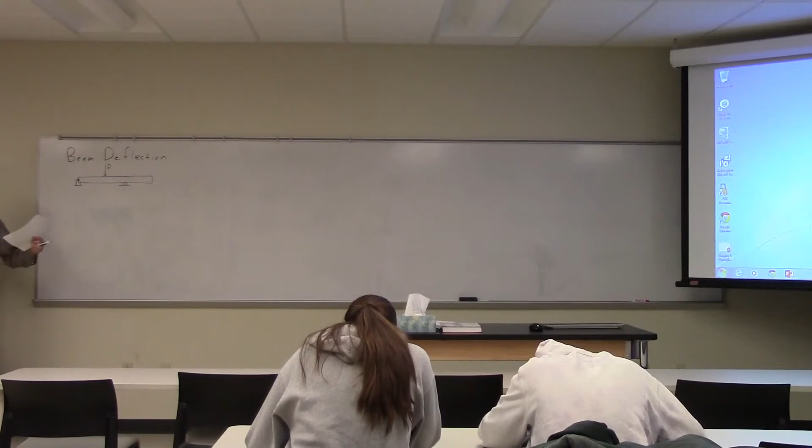Right, so a flagpole can handle a big beam deflection, right? Or a signpost, something where the beam doesn't really matter, like a street light. You can, and in general the roof of a Walmart can accept a deflection, because it's a steel roof, it can accept a bend. So there's plenty of cases where it can, but you're right, there are a lot of cases where it can't.

I mean, if it's a beam supporting a concrete platform or something, concrete typically doesn't want, you don't want the concrete to flex.

Okay, so what's this going to look like? If I push down with a force P there, how's it going to deflect? Is this point going to move? No. What about over here? Is it going to move? Yes, down. Okay, is it going to move here?

We're only talking about the vertical deflection. What about this? Yeah, that's up. So you can kind of qualitatively tell that the beam deflection is going to go like that. That red line is called the elastic curve.

We know qualitatively, in most cases, you have a load distribution on a beam and can generally tell how the beam is going to deflect. When you draw the elastic curve through the neutral axis, you're exaggerating it—we don't expect it to actually bend that far, but it's exaggerated enough to plot out. From here on, we know it's a straight line, since this end doesn't bend because there's no other forces, no internal shear or moment, in that piece at the end.

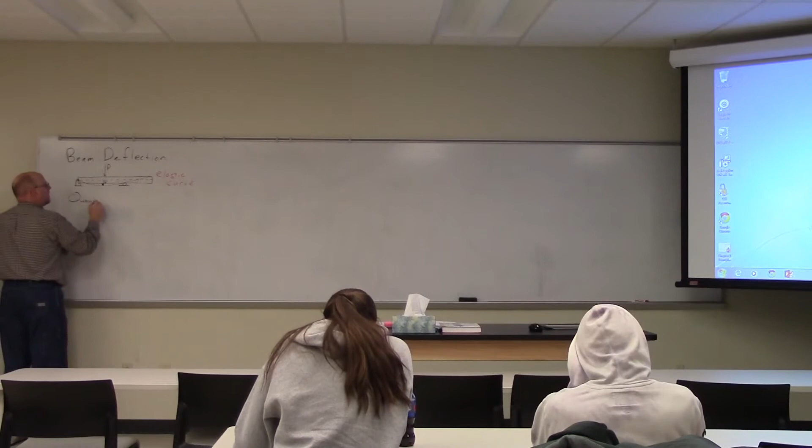So we can draw the elastic curve qualitatively, but generally we don't want just a qualitative measure of deflection. We have this beam deflection we're going to call V, and we want to quantify that beam deflection as a function along the beam at all points. In other words, we want a quantitative elastic curve, not just a qualitative one.

I forgot to fire off the thing here. Oh, that's it—no, wrong chapter.

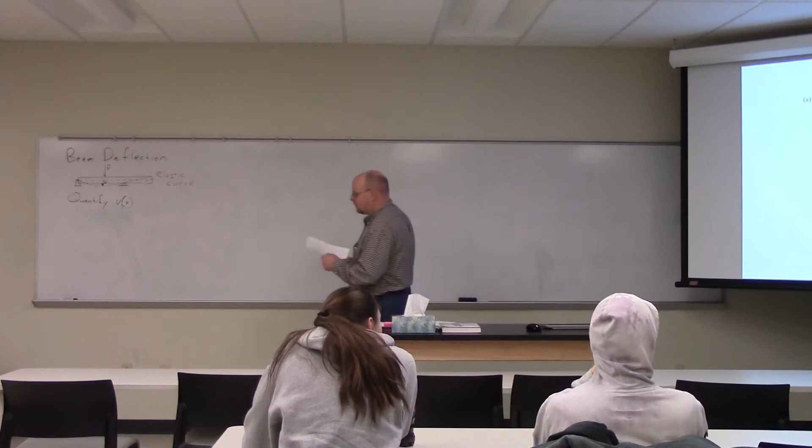What we need to get at is the internal moment, because the internal moment is what's bending the beam. So we have this beam, and you could qualitatively determine that it's going to go down and then up again—you can qualitatively look at that beam up there.

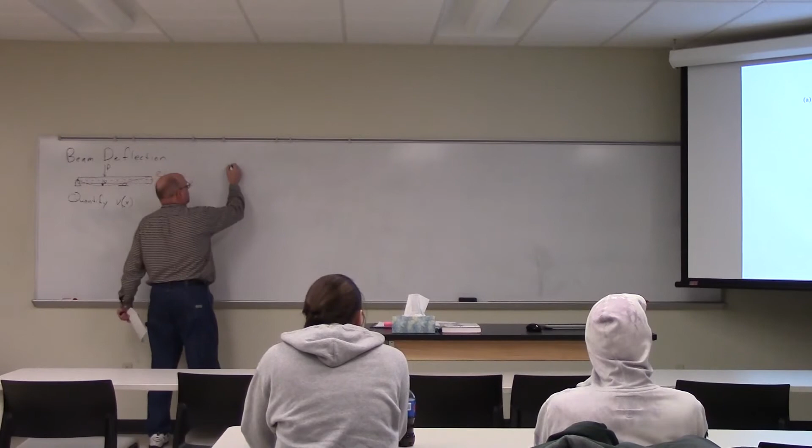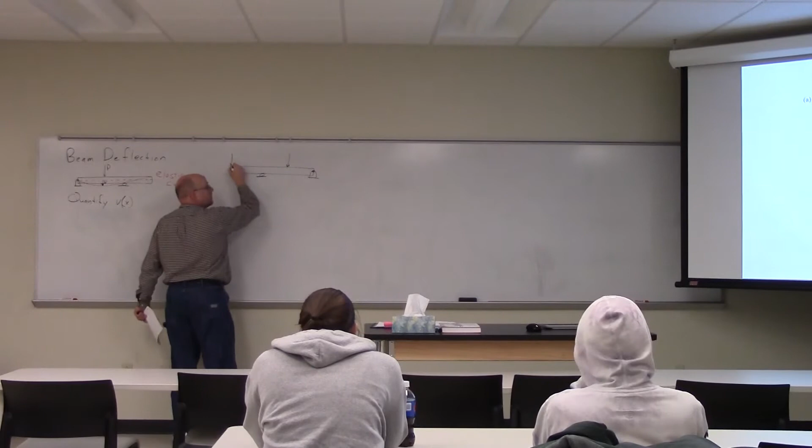The loads are applied here and here, and we draw an elastic curve. You know it's fixed here, and fixed there, so you know it's going to do some wiggle like that.

So what we want to do is find out the moment at each point, and to do that we first need to find the internal moment. For this graph, we have a shear diagram—we do a free body diagram of the whole thing to find out what the shear diagram looks like. Then we take the shear diagram and integrate it to give us a moment diagram.

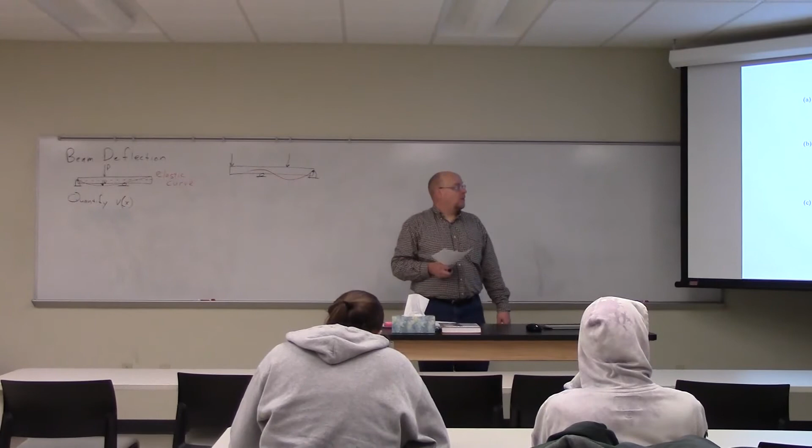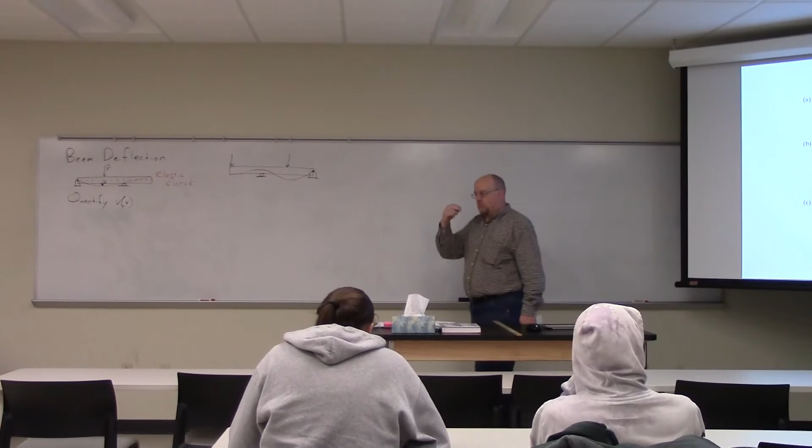Okay, so what we're going to do is take the same approach as we have with everything else. We want to find out the behavior of the beam: take a slice, find the behavior of that slice, and then integrate that across the beam. This is the same approach we took with bending moments, torsion, and everything else—do a slice and then integrate it. Remember this process?

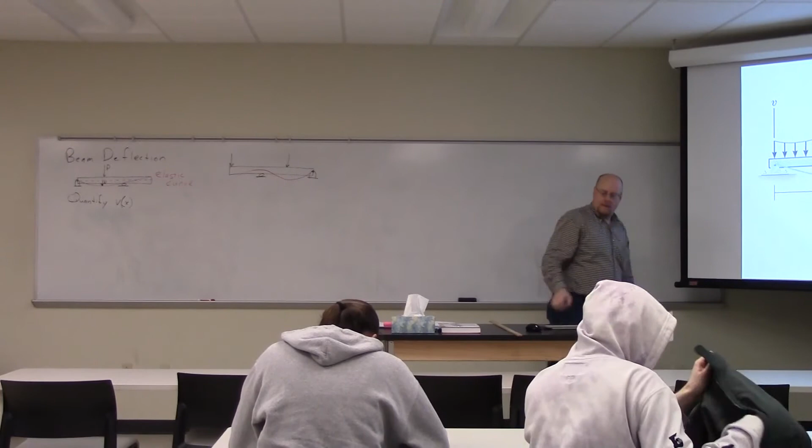Okay, so here's our beam—a different one than the one on the first page. We've got some load out there on the left, a load over on the right, and an applied moment, okay? We're going to take this slice dx in the center, and look at what's going on at that dx as a result of the applied moment, because the moment is what's causing it to bend.

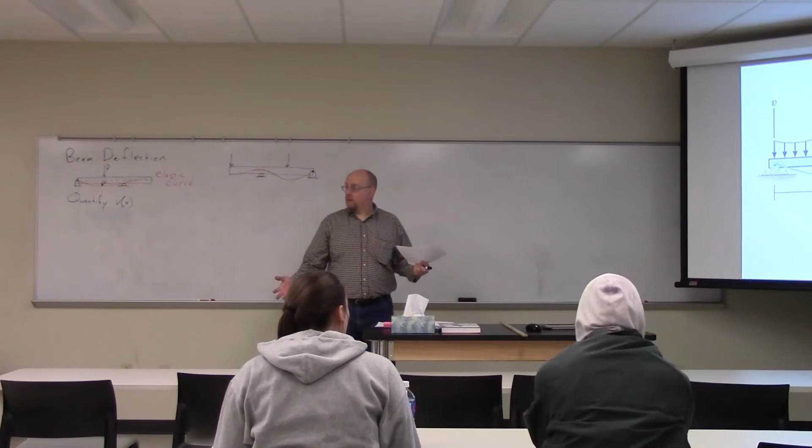Let's back that off in the corner, and then we'll take out that slice. So we have a slice of our beam—doesn't matter what beam it is. We have a slice of beam with the neutral axis through here, with a dimension dx, and then there's a particular plane of interest up here with a length of ds. We're some height y above the neutral axis. Does that make sense, everybody? You understand how I'm defining my positions.

As I bend that up, the right side of my box is going to become inclined with respect to the left side of the box.

So this thing's going to become like a pie wedge. I bend it up. Okay? And obviously exaggerated in this picture, but that pie is going to have some center.

That's what O prime is there. That's the center of curvature of that pie wedge. But that's not actually on the beam, that's just a point in space.

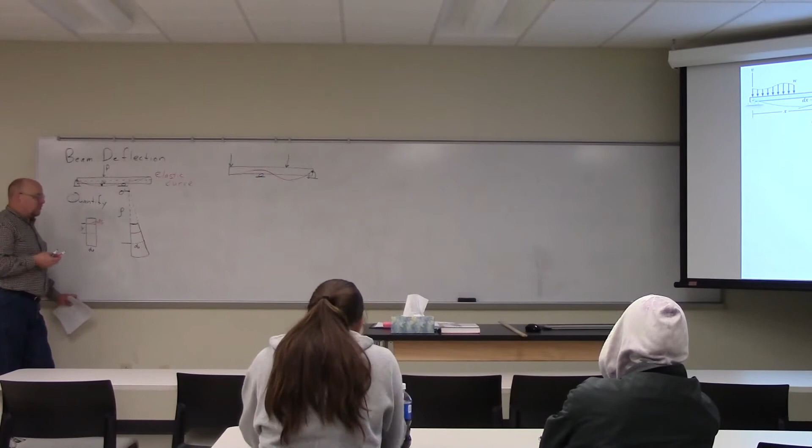But like the length of the curvature, not just a straight length, the line. The length of the curvature part is the same as dx. We're eventually going to let dx go to 0, so those two will be the same. As dx goes to 0, there is no curvature.

This right here now is ds prime, that's our new ds, and it should be less than the original ds, because it's compressed on the top. And we still have the same y dimension here.

And the reason that this happened is because there is an internal moment M within that section. And there's an internal moment that's caused it, yeah?

Since dx is the neutral axis, it wouldn't have an arc, would it? So in the limit, as dx goes to 0, no, it won't. But I've drawn it here as a big, oversized chunk just to get the relationships between everything. So it still would even at large? Yes, I would have to. But the bends, distance doesn't stretch. Okay, the distance along that arc is still the same.

And then we're going to have one more term, and that's theta, the angle, or d theta rather, the angle associated with this incremental piece. Does that make sense to everybody? The drawing, same as the drawing over there on the slide.

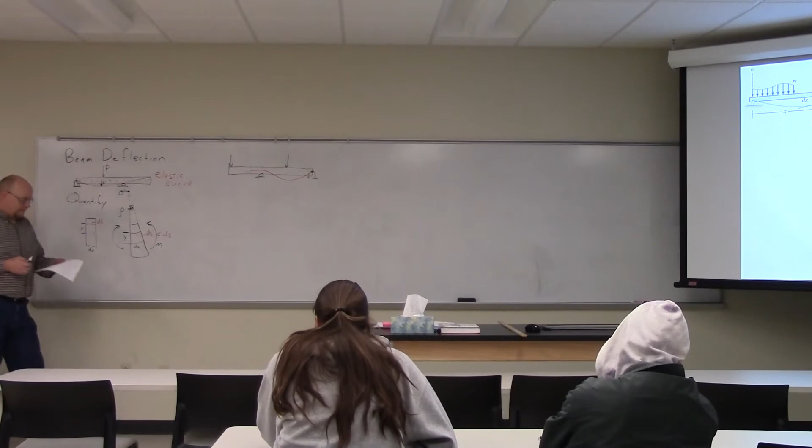Okay, so let's go ahead. So what is the purpose of finding the rho? Yep, I'm just about to show you. I'll do this one. We can express dx in this second case here as rho d theta.

Similarly, we can express ds prime as rho minus y d theta, slightly smaller radius to the ds prime location. And we know the original ds is equal to dx because it was undeformed. Ultimately, what we're trying to do is find rho.

Trying to find out how much it's bent. We want to get something in terms of rho. So, the strain at point Y is equal to ds prime minus ds divided by ds. The change in the length divided by the original length. That is the strain at point Y.

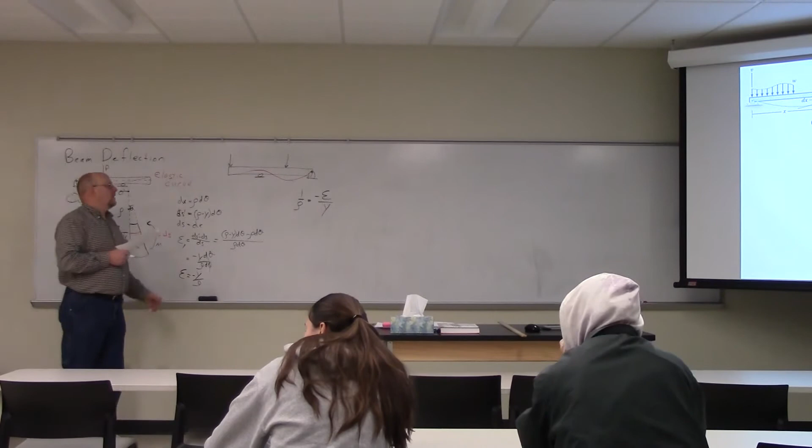We want to get this in terms of moment, right? The whole point is to figure out how the moment is creating this. So how am I going to get this in terms of moment? Well, the moment is essentially a force. So I want to get my strain expressed in terms of the loading component.

So I want to take my strain and recognize that that is sigma over E, for as long as we're in the linear regime. And sigma, what's sigma? Colin, what's sigma?

How can I express sigma? What's causing sigma? What's causing this whole thing? Our shear force on. No, it's not the shear force. The moment. How do I get sigma? Is that why I brought... Yeah, but your name's not Colin.

My over I, over E. Right? Plug that back in here, 1 over rho is therefore equal to m over IE.

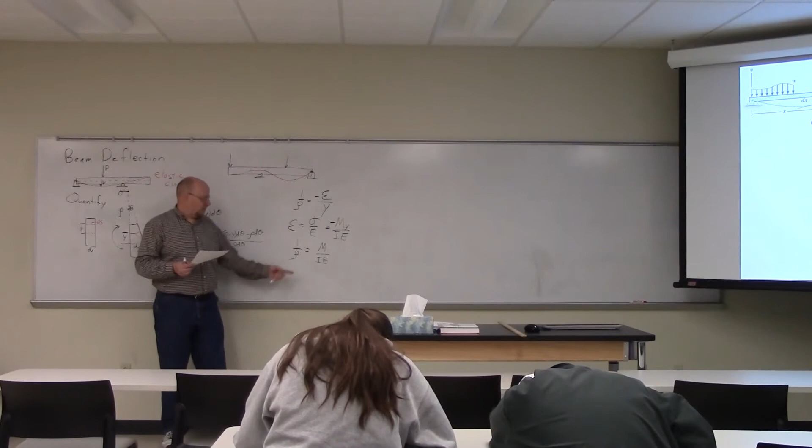But that still doesn't get us to what I really wanted, which was V. And I really want to know, what's this deflection look like? So we're going to pull in some calculus.

1 over rho, from calculus, where V is sort of the... so I'm using both Y and V to represent vertical dimensions here. Y is the dimension within the beam. V is the deflection of the beam. So Y is a position variable, V is a measurement, a measured variable.

V is a function, just like how far the neutral axis was, or the whole beam I guess. Yeah, but the neutral axis is where we track it. So V is the movement of the neutral axis, whereas Y is a position variable from the neutral axis. Does everybody understand the distinction? They're both in the vertical direction, but they represent different things.

Wait, going back a step, I think you explained it, but why is there no negative V down? Because the stress in the beam, I'm applying a positive moment, right? It's one that causes a concave up surface. That positive moment creates a negative stress. The sign of the moment and the stress are opposite one another. So I have to plug in a negative value for my stress. Then I have a minus sign up here, those two minus signs cancel each other out, and I'm going with that. Gotcha. Okay, we're good?

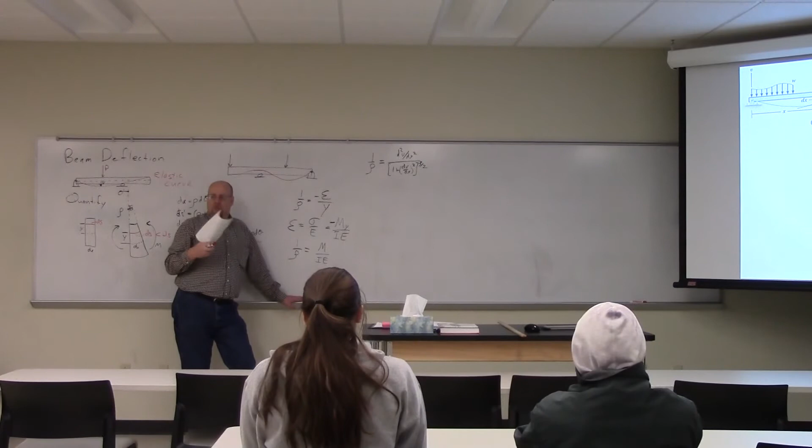And dv/dx is the slope. V is the deflection, and the second derivative then is the curvature. Okay, so that just comes from calculus, we're just taking that for granted. You can go back and do the derivation if you want to.

So V is the actual distance, V is the displacement at that point, the vertical displacement of the beam. What is this? The deflection. Slope of the physical distance? So dv/dx is the slope of this red line at this point. So V is this deflection. The slope of that line is dv/dx, and the curvature of that line is d squared v dx squared. Makes sense.

So the three characteristics of this thing are all lumped together. So V is the function... actually V is not in there, but anyway, V is the thing we're trying to solve. Okay, so that's ugly, right? Equate that over here.

So we're going to make the assumption that the slope is small, so a small number squared is really small or negligible. So we're gonna say that that's approximately equal to d squared v dx squared.

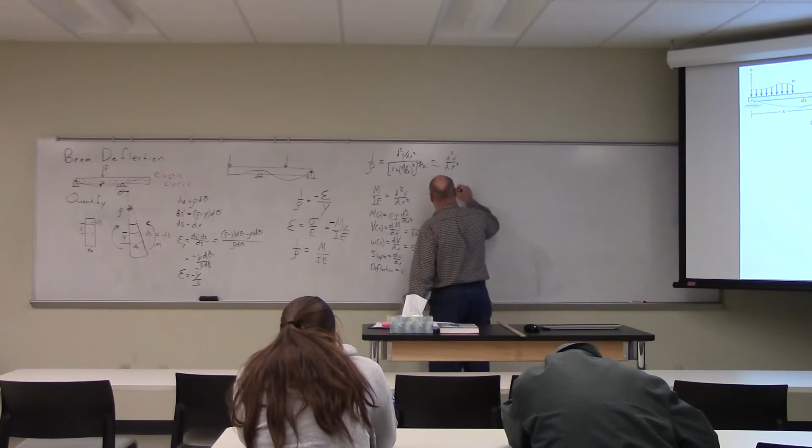So if I want to get back and find out what the deflection of the beam is, I have to take one of these and integrate it however many times it takes, with respect to x. So if I know m of x, then I can integrate m of x dx,

and that's going to give me, I don't know if there's a letter for slope, I don't know if they have a particular letter for slope. I don't know if they do. Little one? Well, that's fine, yeah, I don't want to confuse matters too much. I don't know that they do. Just make it X, draw a little right triangle. Yeah, I'm just seeing if they've got a slope. Hold on. Nope, nothing, okay, little slope.

And the integral of the slope dx is equal to deflection. So I have to integrate twice to get the deflection from the moment. I'd have to integrate 4 times to get it from the load distribution directly.

Each time I do an integration, I'm going to pick up an integration constant. So its slope is going to include some s of x plus c1. And the deflection then is going to become v of x plus c1x plus c2.

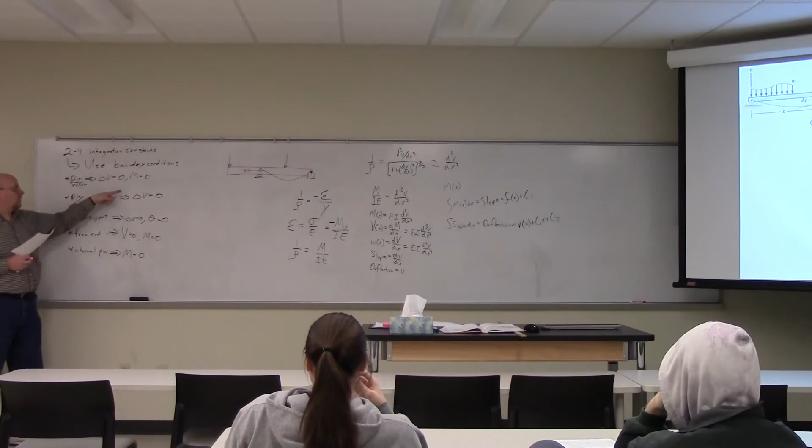So those constraints, when applied to our solution, will hopefully allow us to find the additional constants. Notice most constraints have displacement equals 0. At most of the constraints, the deflection equals 0.

So we end up with this thing, the deflection. If we start from the moment distribution, the deflection has two constants. But I know that it's got to equal 0 at the pin at the end, so it helps me set C2 at least. Does that make sense?

The only one I'm confused about is the pin or roller in the center. So this is a pin or roller in the center — the moment is not necessarily 0 right above that. The deflection is 0, but this thing is bent. It has some net concavity, it has a negative internal moment.

The roller doesn't support a moment, but the moment could exist at that location as an internal moment. Yeah, these are all internal quantities now, these are all beam quantities — none of these involve applied forces or loads.

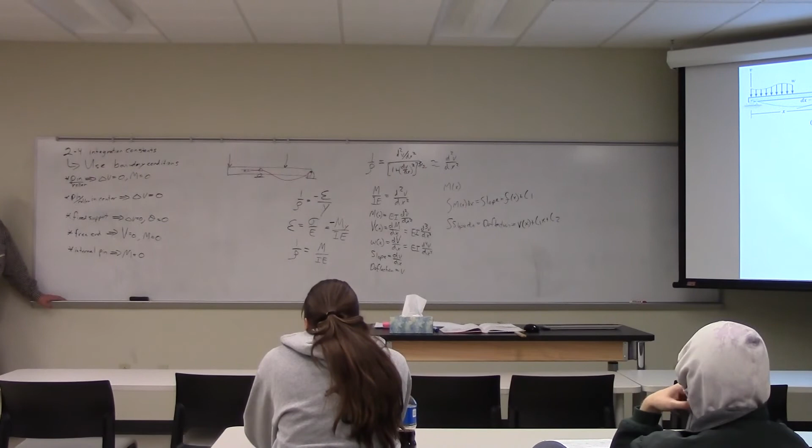What we talked about Wednesday, that you couldn't have two pins in a beam — well, yeah, you don't design it with two pins, you over-constrain the system. So if there was a pin there, there would have to be a roller at the other end. This is something we should have covered back in statics — you can't over-constrain the system, you can't under-constrain the system.

You can only solve for an ideally constrained system. So if you put two rollers, it can't support horizontal load, so you can't solve the problem. If you put two pins, you can't distinguish the horizontal load at either end.

And so, well, you can still solve it, but there would be an internal normal stress created by virtue of the fact that there are two pins — a thermal stress at the least. So it can do it, but you're adding an additional stress that you don't need to.

The reality is, actual beams on a building are pinned at both ends — they bolt this beam onto this girder and bolt this beam onto this girder, so it's constrained at both ends. So there's a normal stress that's created in that process, but by doing this, there's no normal stress in this beam.

We don't build buildings like that, right? No, that's what I'm saying — they build bridges like this. They do build bridges like this, because the bridge is going to expand and contract, and so they create expansion joints, and the bridge is able to slide. It's not necessarily a roller per se, but those little rubber things are on the beginning and end of bridges — just the distance, or their teeth.

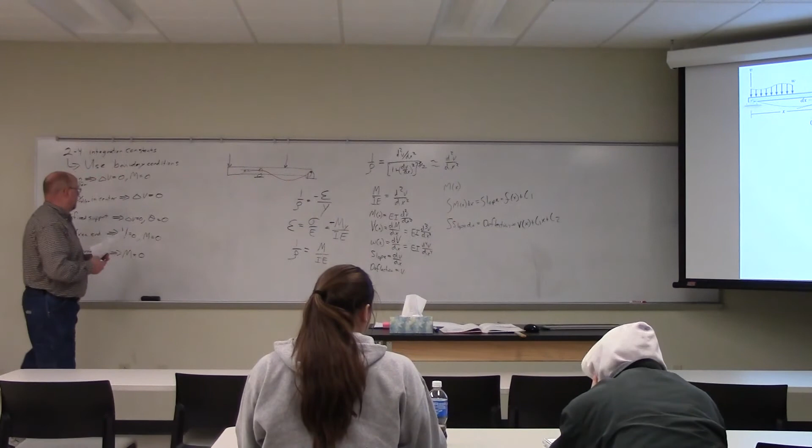Alright, I've got one more thing - I'm just going to go ahead and cover superposition real quick. We're not going to get to any problems today, but the next 3 lectures are going to do nothing but problems, so we can work on this, but it all kind of fits together and I didn't want to lose momentum. We've got this process now for figuring out the deflection of the beam based on the internal moments, and it will be in terms of these constants, so we have an opportunity to design around that - E and I, we can leave as E and I all the way through the process. If we want to minimize our deflection, we know what we're going to have to do to I to get the deflection.

Superposition - it's also possible when you have a very complex loading structure like we have up here to use superposition, because all of these loads give rise to linear relationships. Even when we get down to this expression, w of x is equal to EI times the 4th derivative of v over dx to the 4th - that says there is a linear relationship between v and w. If I double w, it's just a constant of 2 that's going to be carried through my integration. So this is a linear differential equation - it's still a linear relationship. Since it's linear, we can use superposition just like we did for other things we've done.

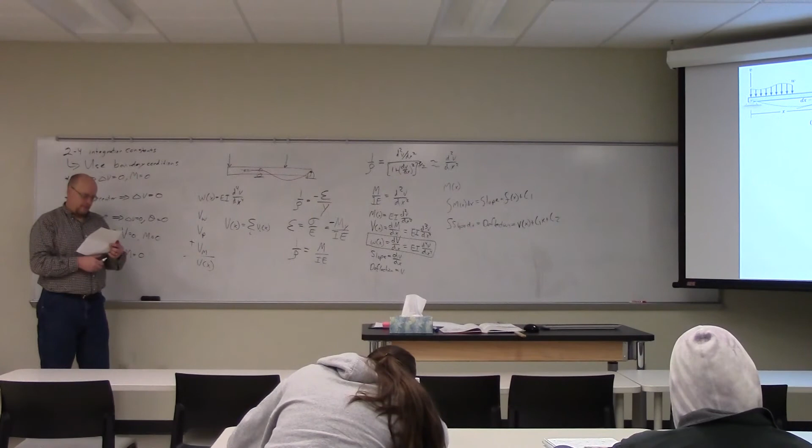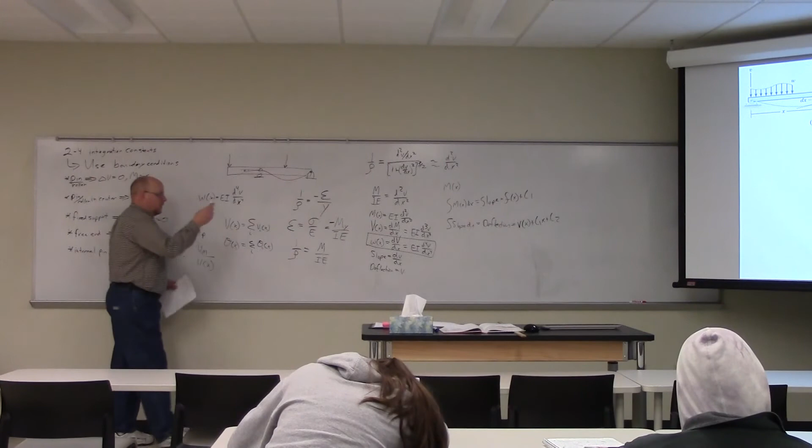And the same is true for theta, the slope, or the shear or the moment. We've already done those. We've already done the superposition of the loads. So we can do the superposition of the position, superposition of the deflection and the slope.

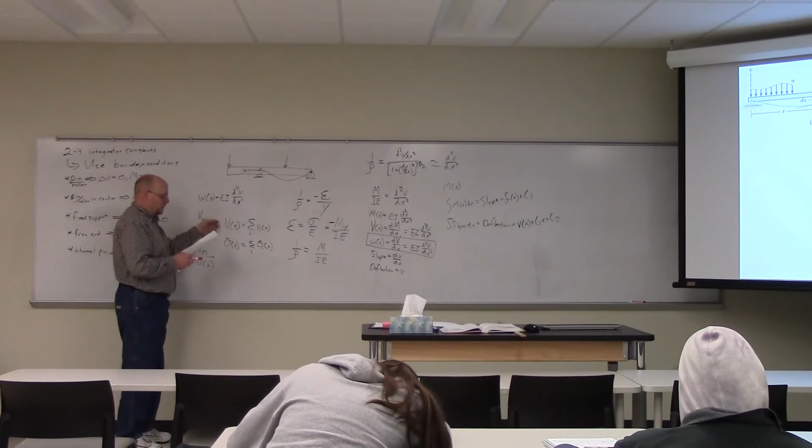So if you look in your book, in Appendix C... Do you have appendices in your book? Make it hard for you. Nope, no appendix.

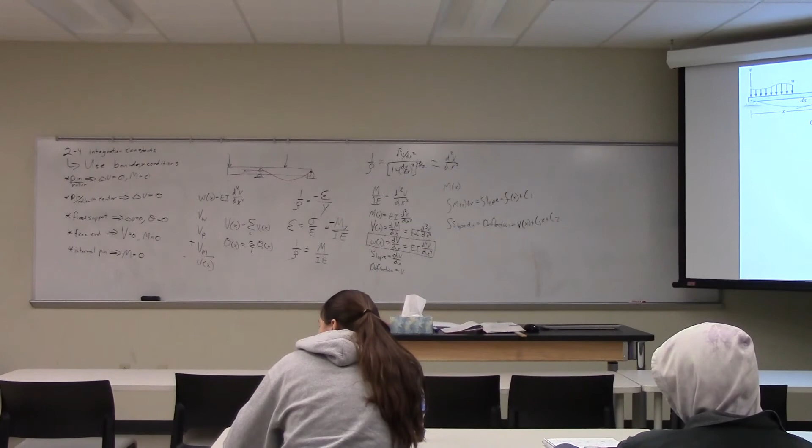So those of you who have a legal copy of the book, if you look in Appendix C, there's a whole table of slopes and deflections of simple beams. So here, I'll allow you to see this, but I'll show it to them. So all these simple beams, right? You've got the slope and deflection formulas for each, for each sort of basic structure of beam.

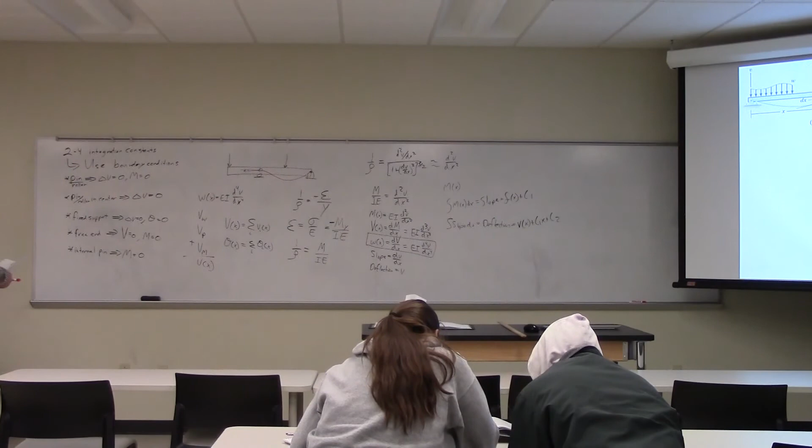And those tables are also going to be on the FE exam, in the reference manual for the FE exam. Everything you get in the appendices here, you'll have for the FE exam. Will that be a thing for the tables and everything you get? It sounds like it's gonna be a booklet. It is a book. It's about that big.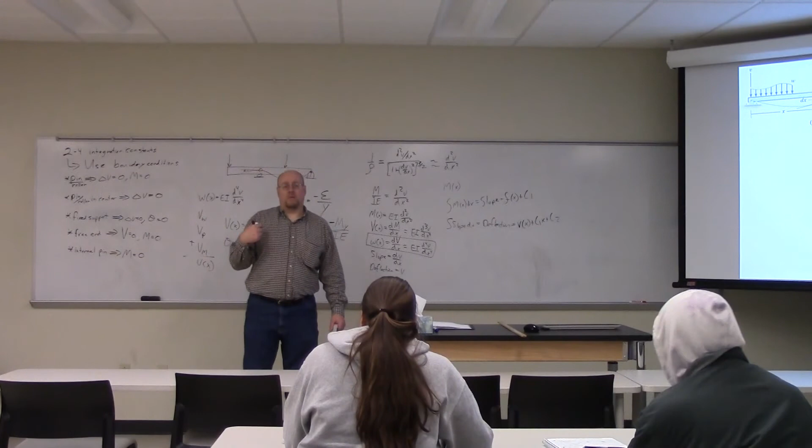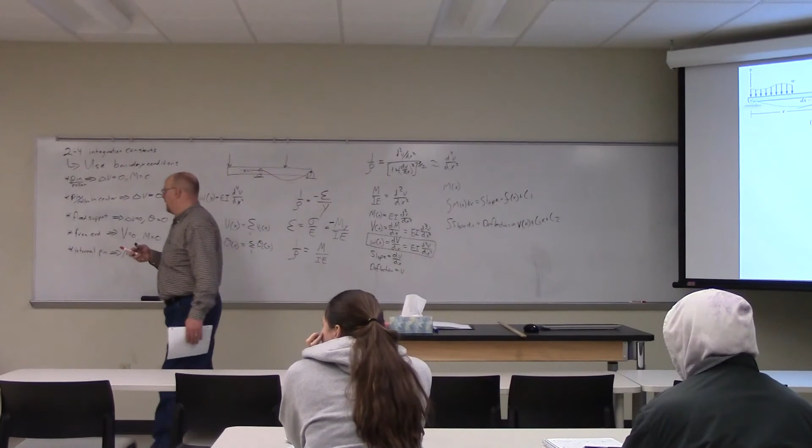Actually, it's not true. You guys are going to take it electronically now. The FE is now online, so it'll actually be an electronic PDF file. Do we take this at the end? If you choose to. If you choose not to, then we give you an exam, and that's our FE-ish type exam. Oh, I see what you're saying. Is Blake allowed to use his abacus on the exam? We'll see what we have. You don't like it, you know.

Okay, so anyway, the point is you can use the tables to quickly get through any kind of simple beam configuration. You don't actually have to do all the integrations. They're covering the basic integrations just like they did for moments of inertia. You know how to do integral of x squared dA, but it's a lot easier when you say, oh, it's a triangle, I can tabulate that, let me look it up.

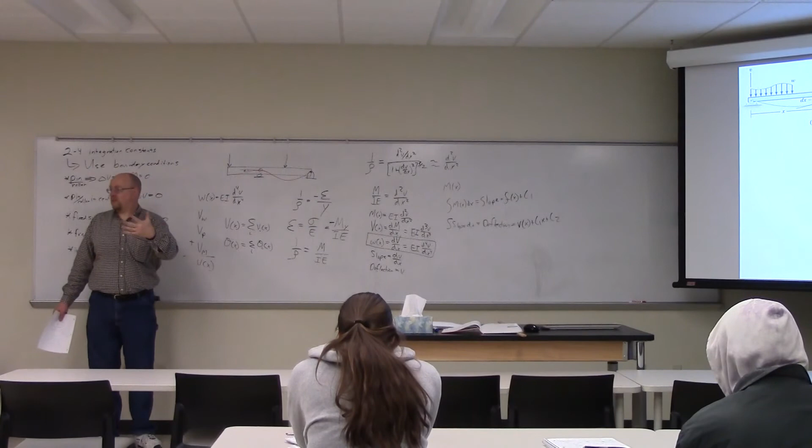So you have to understand this, and if I'm not mistaken, we'll do that for one or two beams, because these are not simple configurations, these are not simple beams. But that top one is, the bottom one is, right, the bottom is supported at both ends, the top one is cantilevered. So, but when they're not, you have to come up with a V distribution or an M distribution and then integrate backwards.

And again, use your... oh, I forgot to talk about this too. Shoot, I'm almost out of time. As you're doing each section of the thing,

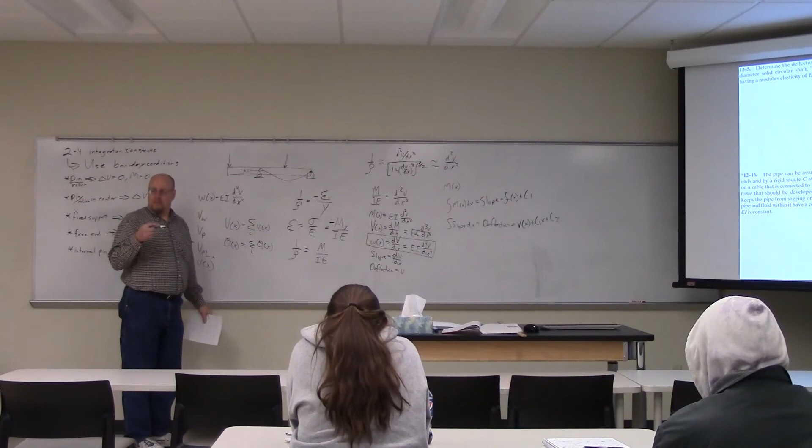so if I were looking at this beam, this section would have one particular V of x function, right? The next section here would have a different V of x function. And this third section would have another V of x function. So I have A, B, and C. I've got three different V of x functions in those three regions. So when I solve this, I can define each function independently with its own x.

If I want to define this as xc, x is 0 here and it goes this way when I'm doing c, but it's more convenient for me to define xb this way. That's fine, I can. Or maybe for this one, it's more convenient to define xa back to some initial reference. You can define it however you want, within the functionality of that thing.

Because you're going to be able to use these constants to adjust at the end. So all you have to do is know that at this point, whatever the final value for xc is, has to be the initial value for xb in terms of deflection and slope.

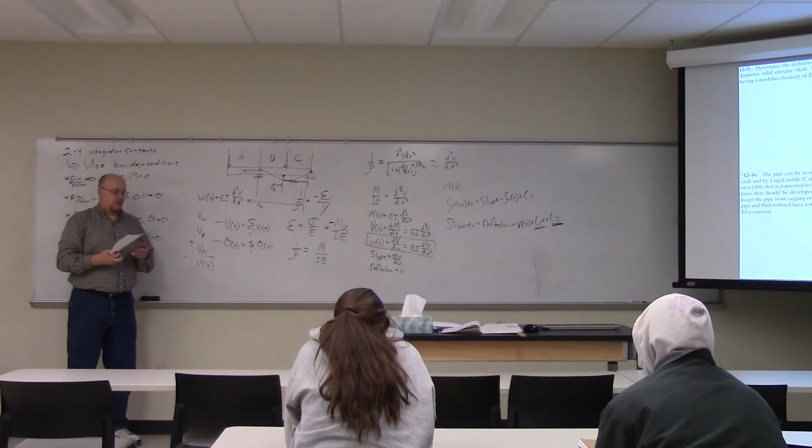The beam does not undergo any kind of change, any kind of discontinuity. There's no discontinuity in deflection or slope on the beam.

The beam doesn't go down and all of a sudden turn back up. It has a continuous flow. So since we know these are continuous, I can find V sub C at this point, and V sub B at that point, and know that those two have to be equal.

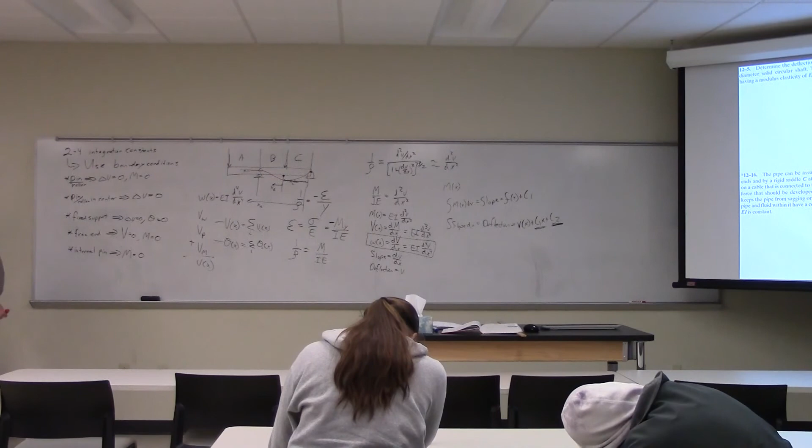What about some sort of a sine function? Why can't we do that? Well, it just seems like the way you have it written, it looks like it could be a sine function continuous from A to C. It could be, but not necessarily. I mean, it's possible, but you'd have to have just the right load.

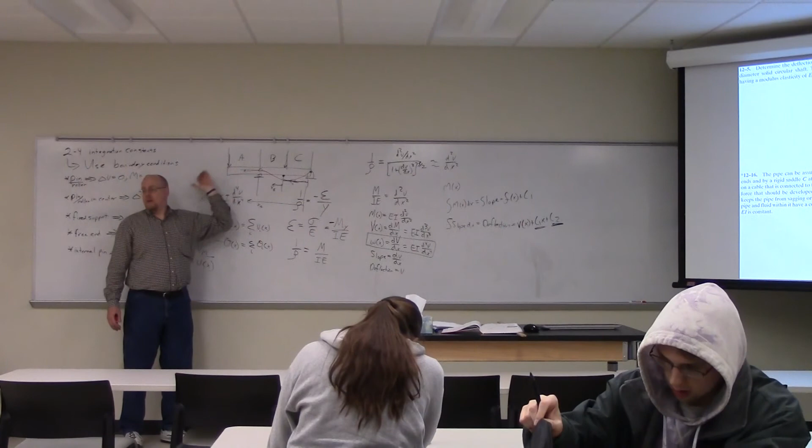So ultimately, if V is a sine function, then W is going to be a sine function, because the fourth derivative of a sine is a sine. So if indeed I had a sinusoidally distributed W on top of this beam, and it was cantilevered so there was nothing else acting on it, then I might have a sinusoidal deflection.

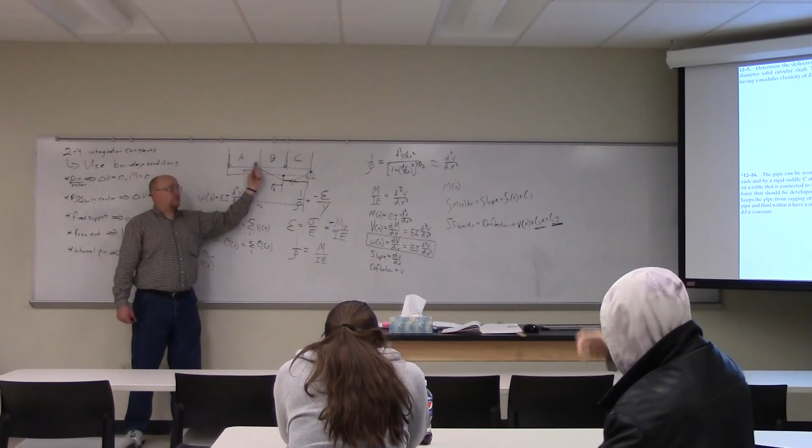Or it might not, because we can still have the integration constants. In this case, you've got an extra force sticking up here, so just because W of X is sinusoidal at the top doesn't mean it's the only load. So you'd have to do superposition. You have a sinusoidal thing from W of X, but then you'd have some other deflection due to this force pushing up here.

So in region C, do we average the V function across C? No. Is it like an average? No, you plot deflection as a function of position. This red line has some functional behavior. We're deriving v as a function of x, an actual expression of the line.

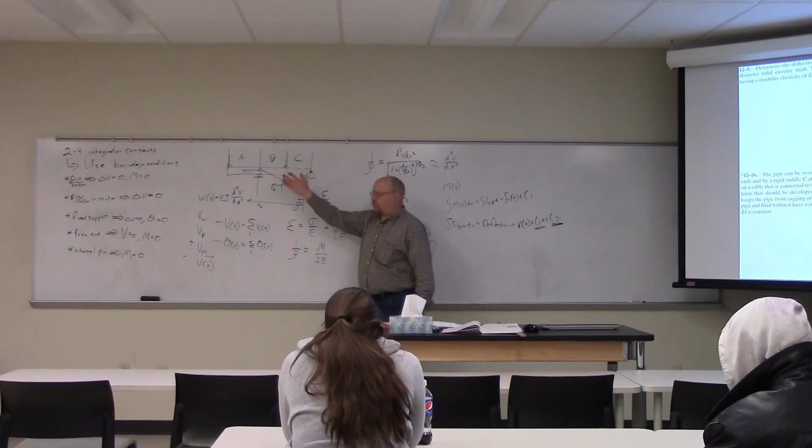So with the superposition though, and comparing it to that, do you cut it off at each place there's a new loading? So functionally, if you did the shear and moment diagram for that... I know we're over time, so if you've got to go, you've got to go. But if I do the shear and moment diagram for this thing...

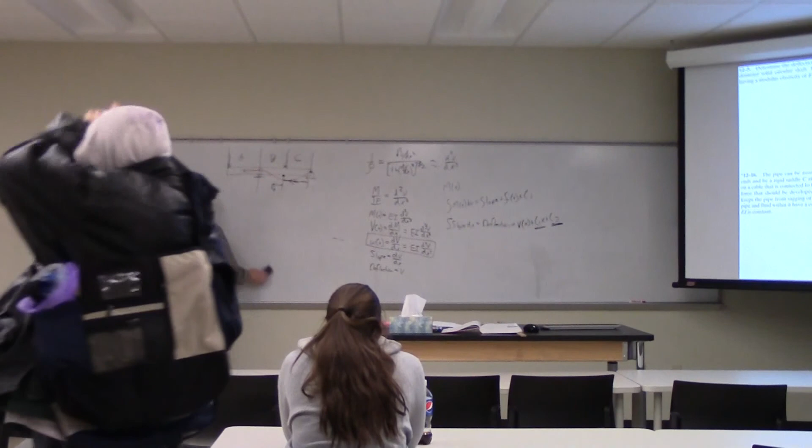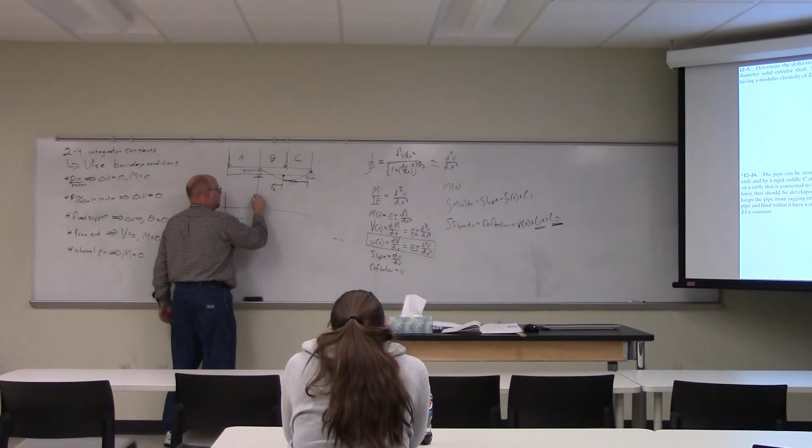I've got a downward force acting out here, so I'm going to start off with a negative shear, and it's going to go over to here. And I have an upward force, and that upward force is probably bigger than the negative shear, so it's going to go up to here. As I come across, then I have a downward force here that drops my shear. Did I do that right? Oh yeah, this one I think is pushing up. If you do the analysis, put equal loads here, I think that one's pushing up.

So anyway, that's what your V looks like. So your moment diagram, I can't remember, is going to do this, and then this, and then... no, I don't know, I don't have real values here. Something like that, maybe, I don't know. I'd have to have real numbers to know.

Okay, so that's my thing. So what I'm going to be concerned about is the functional behavior in each region, because this function is different than this function, which is different than this function. So the breakpoints are defined by wherever my shear and moment diagrams undergo changes.

So then how do you have more than one? Like more than one in each place though? I don't know what you mean by more than one. Like with the superposition? Superposition only applies back to the displacement and slope, the deflection and slope.

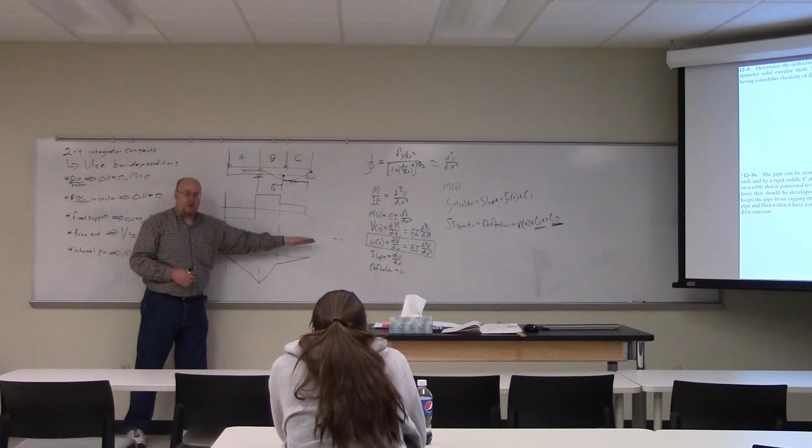But if I did it separately, if I just said forget it, I'm going to do each force individually, I would get one V map, a different V map, and a third V map. And I would add those three together, and it would give me the total V map. Oh, I see what you're saying. Okay, yeah, that makes sense now.

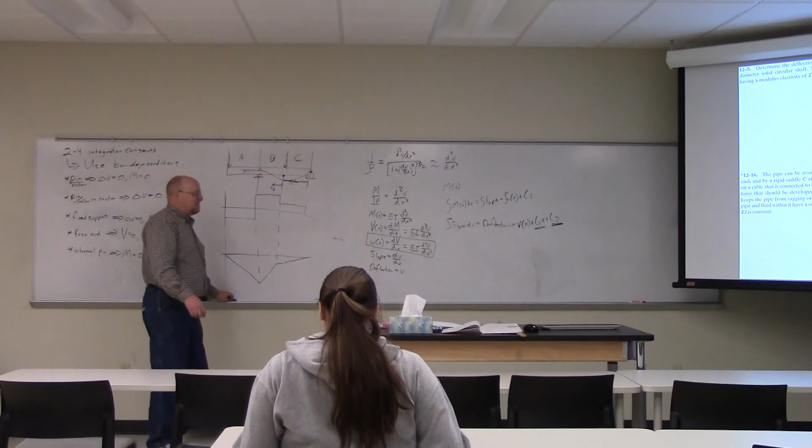Okay, you guys good? Good. It's amazing how much more we get done when there's no practice. Seven extra minutes? No problem, I got it. Well, I'd rather do seven extra minutes and talk about cool stuff for five minutes.